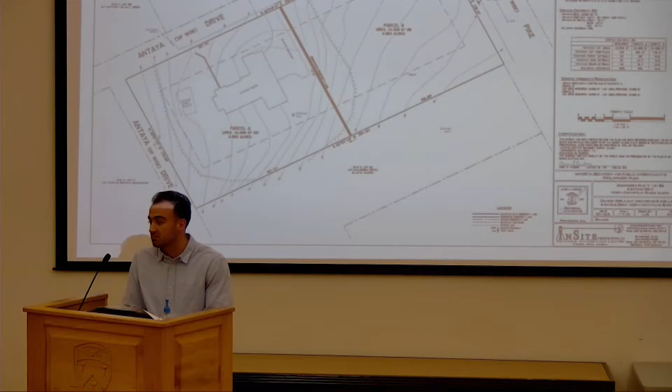Questions? Yeah, does the board have any questions? I do not. Okay. That 20-foot wide drive that's over to the left on the plan we're looking at, is that a paper street right now? I believe it is. Okay. Is that paved? Oh, that just got paved. Mark, do we know what that connects to? What are we referring to here, Jeff? The one that's running north-south. Oh, north-south right there? Yeah, that's a paper street, so it doesn't really connect anywhere. So coming off of Providence Pike, it's paved from Providence Pike all the way to probably the extreme limit of the house.

So there is frontage on Antaya Drive for the existing house, and on the proposed lot, there's frontage along Providence Pike, and then coming up, that paved area, I'm going to call that an easement on Antaya Drive. So the corner lot has pavement on both corners, and the pre-existing house lot has sufficient frontage on Antaya Drive, and they're correct. That road was just paved within the last year. Okay. Great.

All right, then, if there are no comments from the board, I'll open up the public hearing. So I'll make a motion to open up the public hearing. Do I have a second? Second. All in favor? Aye. Aye. Anybody for the public hearing? Make a motion to close the public hearing? I'll make the motion to close the public hearing. All right, we have a motion to close the public hearing. I'll second. All in favor? Aye. All right.

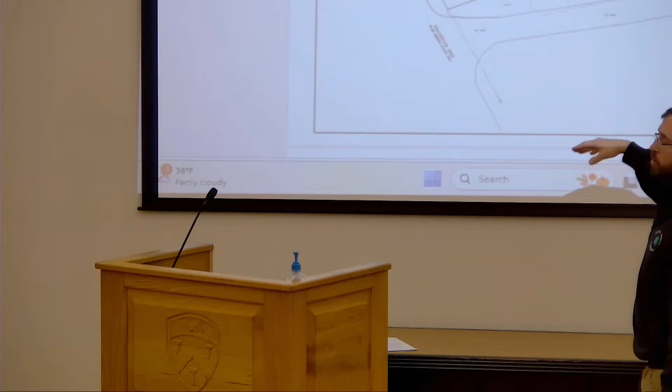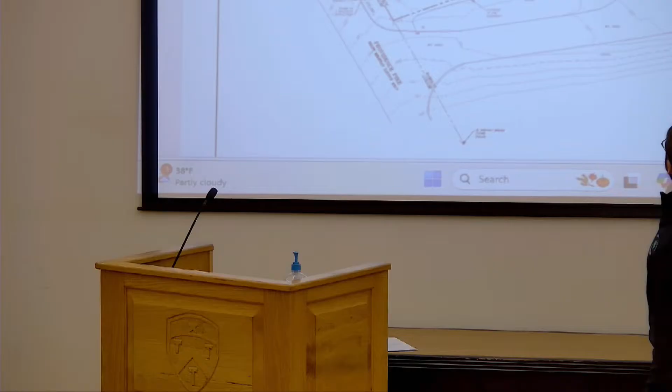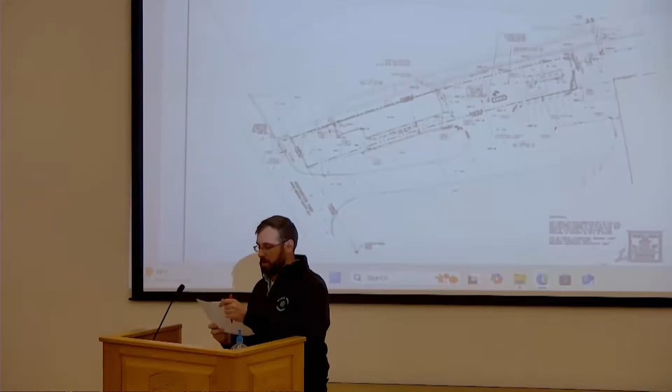You can scroll to sheet 3. This is what the current site looks like. If you could zoom in just a little, it's just fuzzy. There we go. Again, there was some expansion of the pavement in the rear of the parcel. The fueling tanks, the concrete pads are all in the back. Septic system was upgraded, and generally pavement was increased on the site from the previous site conditions. So next, going into the proposed design, or what we're coming back with for the final component of the site. If you can go to sheet 4.

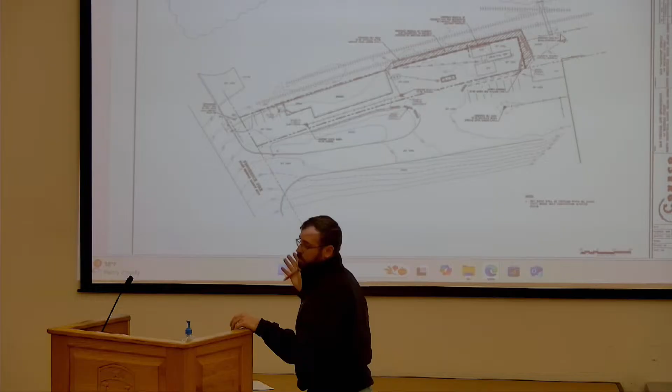So what we're gonna be doing, from the previous site conditions, is we're removing pavement, concrete, Jersey barriers, other things that had encroached across the property line. Our client wasn't aware of that stuff at the time. This was all stuff that was presented at the pre-app meeting as well. So just reiterating, given the revised submission, trying to run through it quickly. We'll be adding the positive limiting barriers. So this is sheet 4, go down to the next one, I apologize.

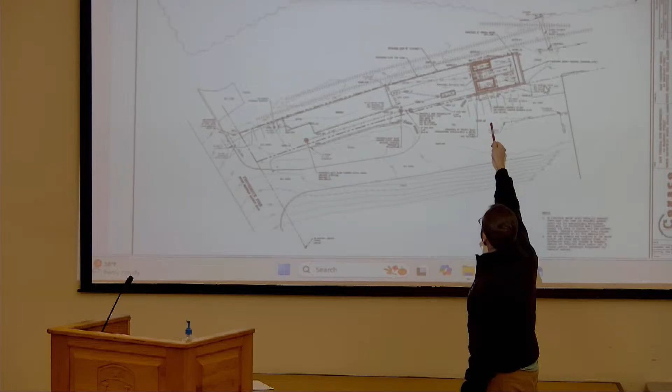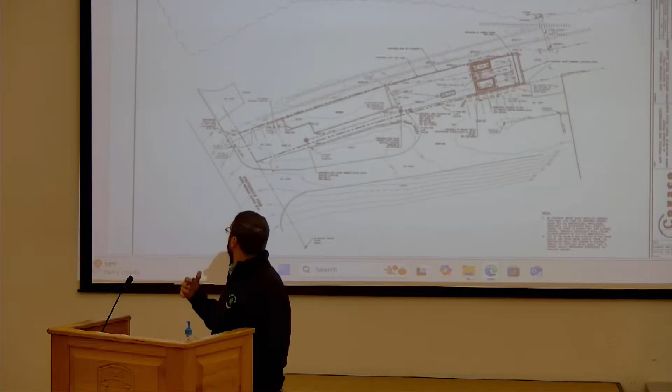Sheet 5 here. On the next sheet, I have a zoom in of the tanks and what's around there. But we're adding positive limiting barriers. Those are the grooves that are around gas stations. They're sized to catch any leak or runoff that comes from fueling operations. And then, additionally, the drainage plans, where from the previous set we've added some additional things to help with the drainage and systems there.

Previously, we just had some catch basins, a little trench drain, and some smaller stuff. To make that system function more properly, we're actually adding a trench drain that surrounds the entirety of the concrete pad. Zoom to sheet 6, right here. So this is a zoom in around the concrete pad and what the actual fueling area will be. So positive limiting barriers are obviously easier to tell here.

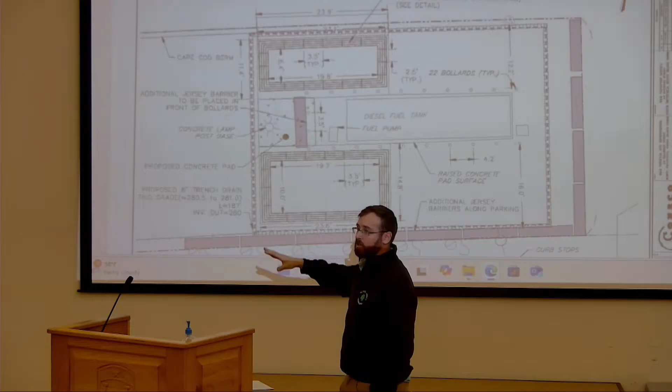Those are the grooves; those are actually sized and spaced, all done with calculations, which were supplied in the memo to meet the requirements of the fueling. And what you can see around the perimeter here is an additional 8-inch trench drain. It surrounds the entirety of the fueling tank and the fueling pad.

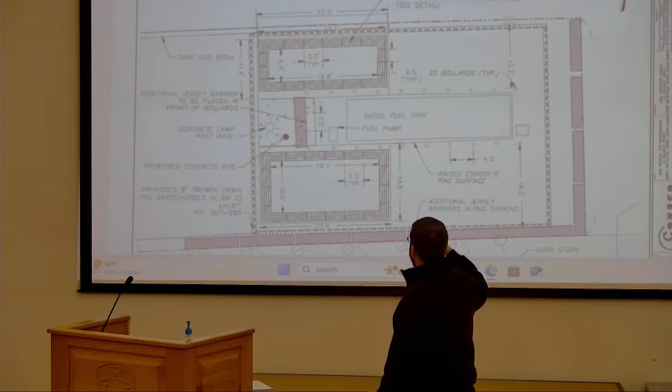So that's an additional stormwater control: any water that hits the surface around that tank and the fueling areas will be captured into that trench drain and then sent off the edge here to the drainage system, which, if we can go back to sheet 5, collects at this corner right here and goes down to, again difficult to read on this plan, a water quality unit, a Stormceptor 450i, which is sized for this volume. We included the cut sheet for that.

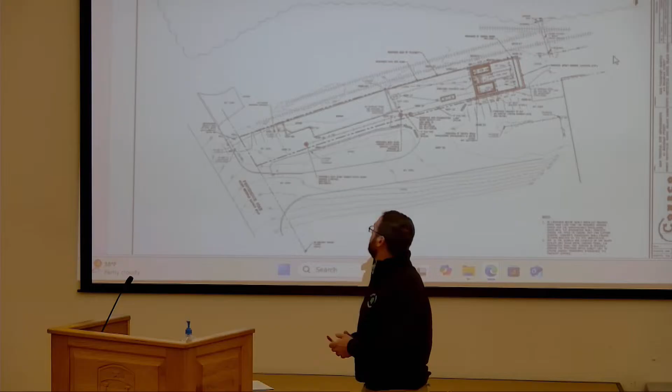The way that works, it's an oil, water, grit separator. Water enters the system, oils and greases float to the top, everything else settles to the bottom, right? That's your initial component of separation and treatment of the water quality. From there, it enters 2 proposed deep sump hooded catch basins. The deep sumps are 4 feet below the invert, so sediment has space to settle out there.

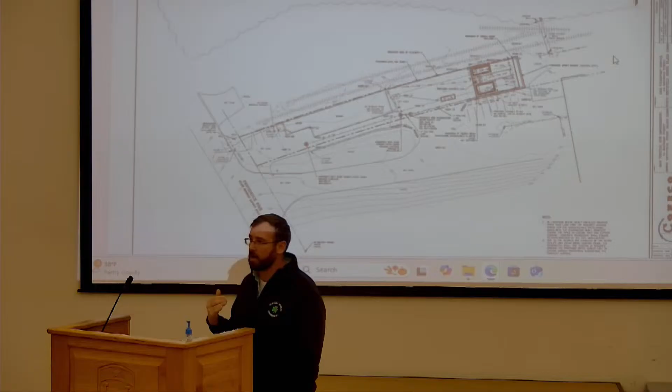And then we have the hooded outlet on those, right? Same general concepts. We're preventing oils and greases from going out by the hood, the pipe that goes down, and water flows out that way. So those are some additional features from the previous submission, or the pre-app meeting.

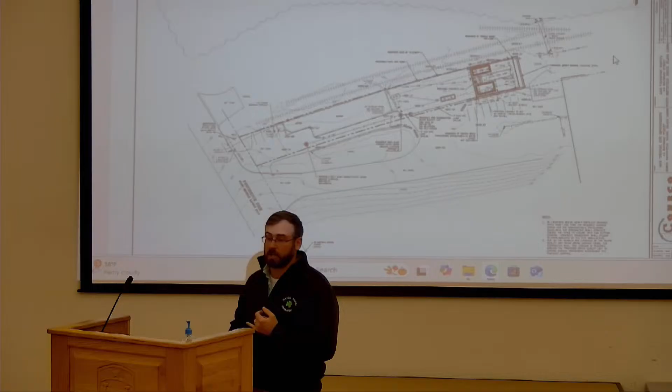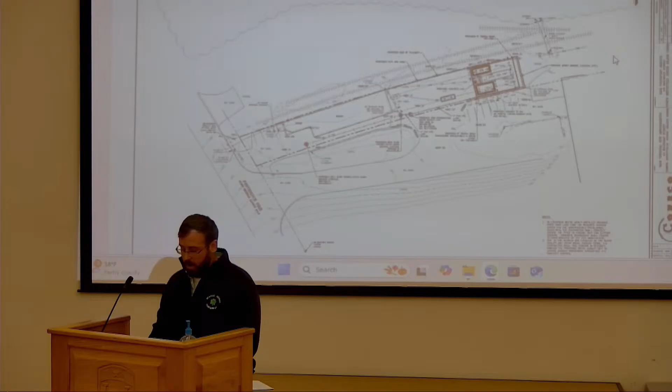DEP has supplied, in the email, the written recommendation that, as Matt had stated, there are no stormwater requirements for this site. It's out of fresh water, not disturbing a large amount of area, and there's no underground infiltration. All of these components are surface components to treat the water and contain any contaminants before it leaves the site. So those are the stormwater components that we've upgraded from the last submission.

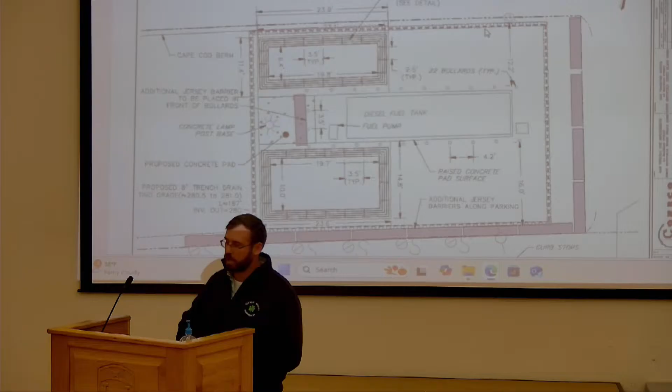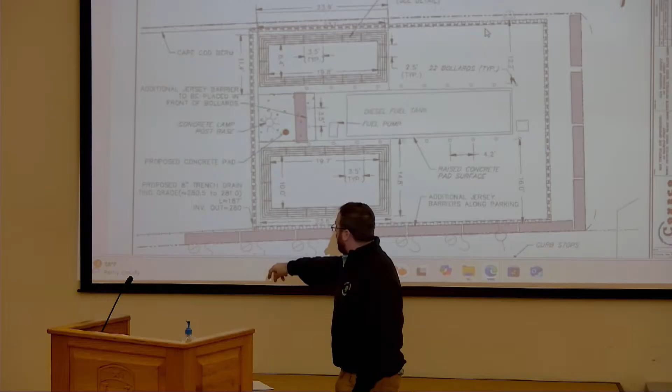And if we can go back to the zoom in here, there was a lot of concern at the last meeting about protecting the actual tank, making sure it can't be driven into, security measures, all of those things. So we've put in Jersey barriers around the entire perimeter at the property line. There's parking along this edge; you can see the signs. A vehicle would have to go through a Jersey barrier, a set of bollards, and then hit a concrete tank. So there's a significant amount of protection of the tank.

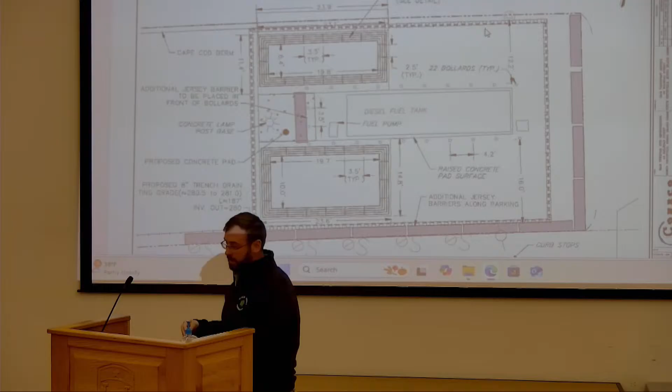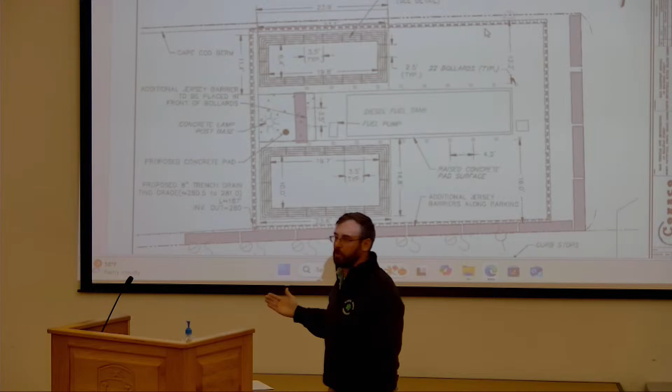Additionally, we added a Jersey barrier in front of the tank, as requested by the board at the last meeting. These are all physical things that will stop it. There's also a lamp post in front. There's a lot that someone's going to have to go through before they can make contact with this tank. So all of those components really ensure that there is no cause for concern in regards to a major catastrophe or spill.

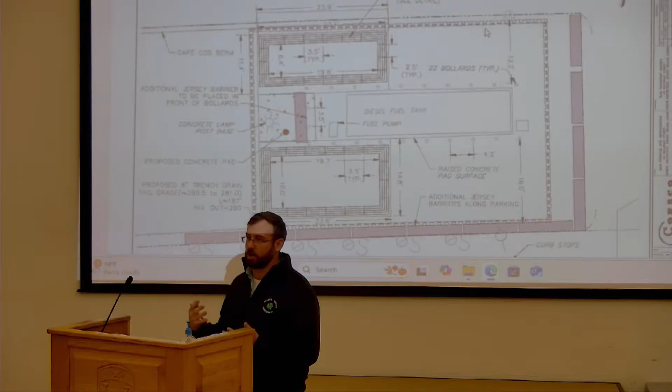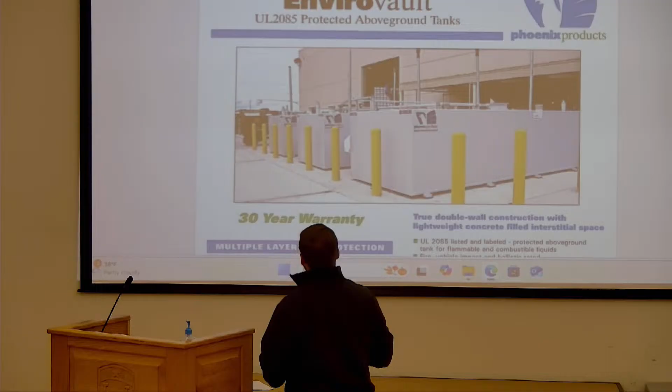If you could go back to the list of sheets, the folder. Awesome. And then we have the EnviroVault, the third one from the bottom. Here's the spec sheet that was supplied to the board prior to this. I'd like to highlight some of the components stated in the specs: it's fire resistant, vehicle impact resistant, has integral earthquake and hurricane tie downs, and is ballistic rated. This thing is a vault, an environmental vault. It's very difficult to get through.

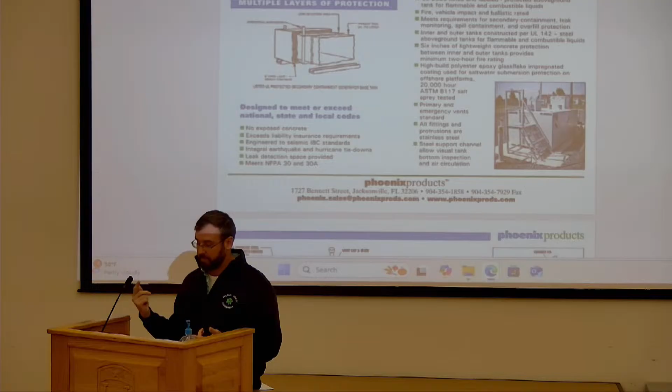It meets all the requirements for secondary containment, leak monitoring, spill containment, and overfill protection. The tank is designed not to have leaks. It's 6 inches of lightweight concrete protecting the inner and outer tanks, providing a minimum 2-hour fire rating. Steel support channels allow visual inspection of the bottom of the tank. With an above ground tank, if there is a spill, you're going to see it. It's not an underground tank where a leak goes unseen.

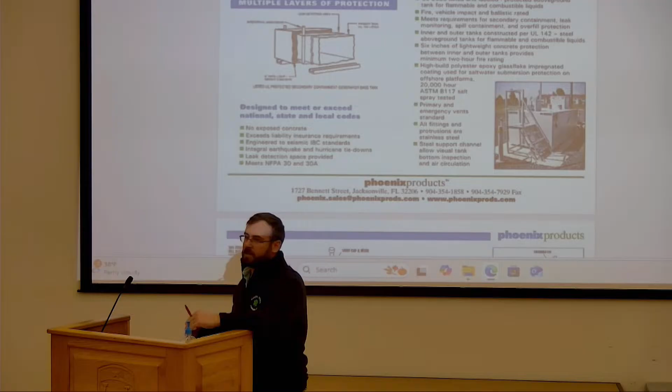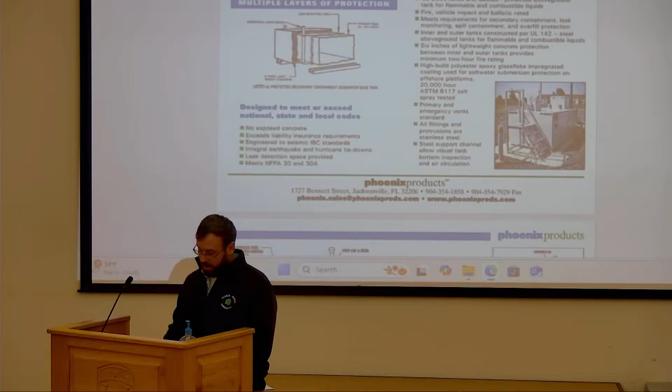So I hope and believe, with the board, that with all of these additional provisions and the stormwater components we added, we can allow the site to go as constructed, and they can start filling their tanks and using it from there. With that, that ends the presentation. I'll turn it back over to the board for any more conversation.

Okay, thank you. Any questions, comments from the board?

No questions, but I do appreciate the extra efforts and work that you've put into the containment, because I think that was definitely a concern with the original plan. So thank you for that.

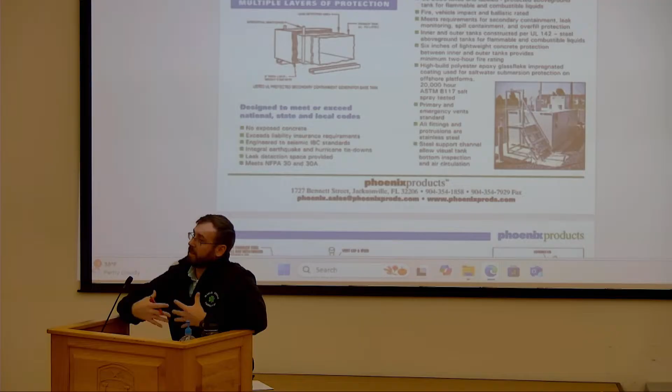I have a question. When you talked about and showed us the layers of protection, I remember Dr. Benoit had requested, I don't know what it's called, but like an impervious, almost like rubber under sort of. Yeah, so he had mentioned a bladder system. Yeah. And unfortunately, those don't necessarily work for above ground storage tanks. I think the application that he was referring to was for an underground storage tank where there would be that tertiary level needed. To add a tertiary level of containment, like complete containment, we're basically building another tank around our 2 existing tanks, because otherwise the stormwater would collect in that tertiary containment, right? The bladder system doesn't work, right?

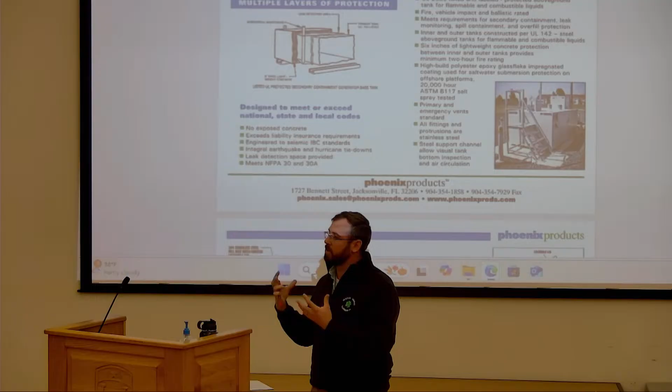Because any rain's going to hit, it's going to collect into that tertiary containment and then get held in there. So then you have to empty that between each storm, and it's counterproductive. I think our trench drain system allows stormwater to run off, and it'll collect and prevent water and fuel from escaping into the environment uncontrolled in the event of a spill, right? It has to go into our stormwater systems. It has to go into the water quality units through the catch basins. That is another level of containment. It's not the complete 10,000 gallon tertiary bladder containment that Mr. Benoit was mentioning at the last meeting, but I think it does represent kind of that third level, in a system that would help make it more compliant in that regard.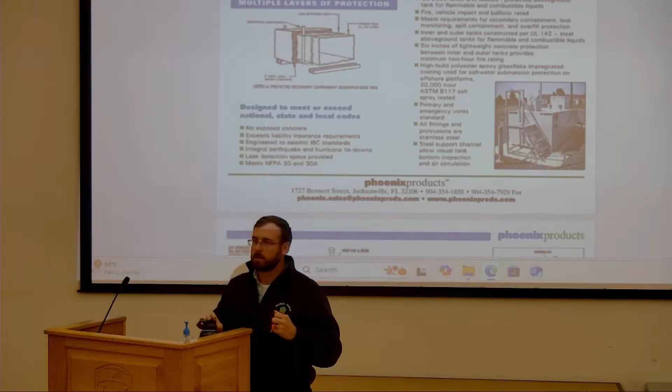Do we have a point where we discuss this as a board? Because I don't think I have more questions related to that, but I would want to discuss that at some point. We can do that right now. Okay. Yeah, I just wanted to say, it's actually over an aquifer overlay district, not just watersheds. It's drinking water. And residents are very concerned about our aquifer district. And 10,000 gallons is I think a swimming pool.

And so I have been thinking about this since the last time you were here. And I was thinking of the berm and the rubber thing that Doc was talking about. So if there were a leak, it sounds like there's a filtration system where some of it would go into, but what about if there were a significant leak that was not seen quickly enough? What happens to the oil or the gas that comes out? Sure, I can speak to that. I'm Brian Klingler. I'm a principal environmental at Conoco Environmental Engineers and Scientists. I'm a PG and an LSP.

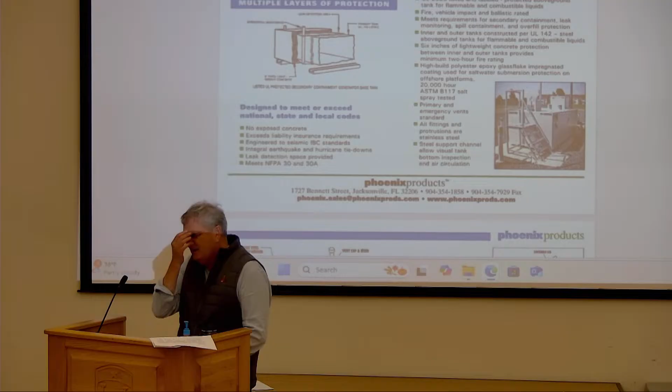The point of having an above-ground storage tank, and the biggest advantage of it being above ground versus historic releases with underground storage tanks, is you can visually inspect it. This has steel channels underneath the tank itself so that the bottom of the tank can actually be inspected during the course of the use of the tank. So it's not like it can have releases to the aquifer that would go undetected. Everything is above ground. Under the secondary containment, this is a steel tank and then a concrete wall barrier and then a second steel tank and then an 18 mil polymer coating. So you have 4 layers of protection. You can see the bottom of the tank.

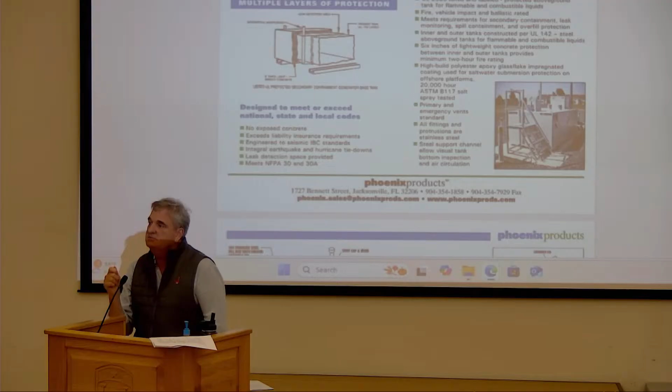Any spill that would occur at the worst would be a pull away on the line, and that has automatic shut off protection. So you're dealing with a 10-gallon release at most if that were to ever occur. And obviously there's contingencies upon that. But there is no way for this tank to leak short of a ballistic event. I mean, it's ballistic proof, so we could go down scenarios where you could have a release of that large scale, but I don't see how that would happen because it has fire protections, impact protections, and it's bermed.

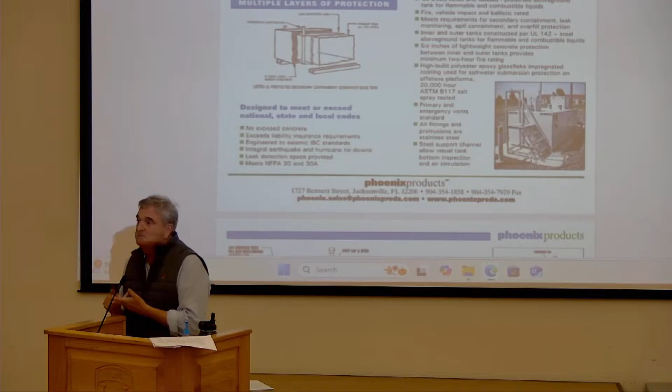It is really state of the art. So you can go down so many levels and hypotheticals. But I did a study out there where we put 3 monitoring wells. So we have looked at the aquifer. It's non-detect in terms of soil. It's non-detect in terms of groundwater. You can drink the water underneath this tank in this facility. It is a maintenance facility, so it's good stewardship currently with the ownership. They take it very seriously. So we will be able to monitor the aquifer. And in terms of a cataclysmic release, I just don't see it occurring.

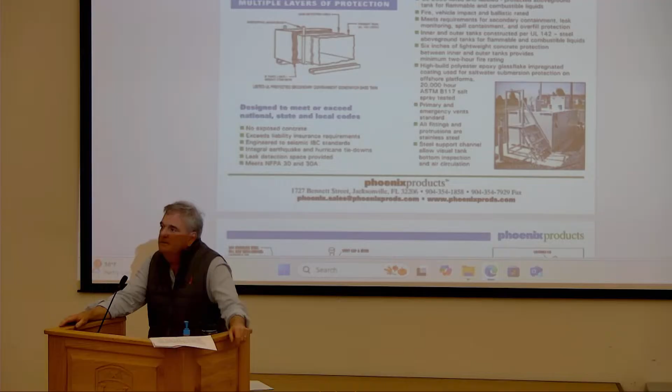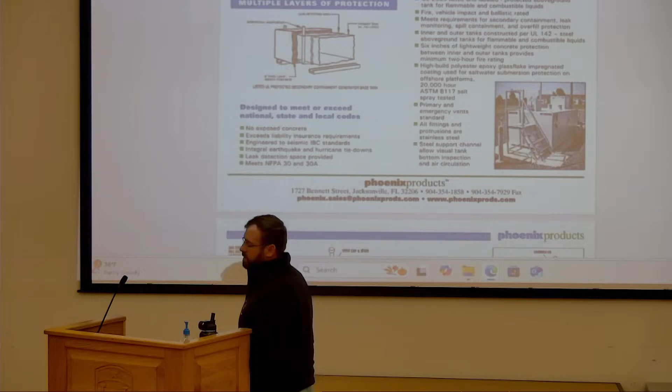Thank you. That's helpful to hear your explanation. If I could just also add, I think you mentioned that the catch basin did have the capacity, if there was a catastrophic spill, to absorb the 10,000 gallons. Is that correct? Did I hear that right? So the catch basin systems aren't sized for that. They're for stormwater.

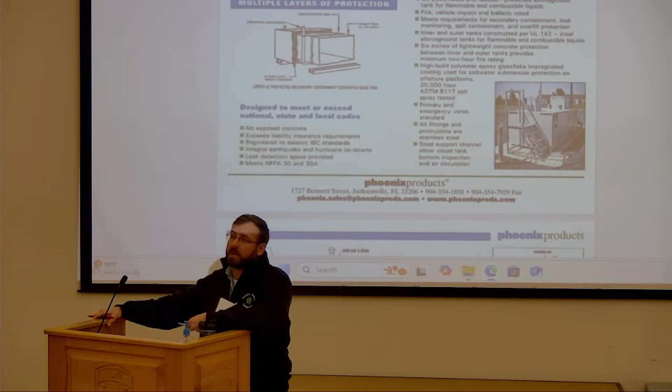The bottoms, the sumps within those, are meant to collect and hold stormwater and actually allow for sediment to settle out to the bottom. There is a component of the catch basins that will prevent oil during standard leaks and things like that from continuing out the stormwater flow paths. And those need to be cleaned and maintained and monitored. And if there is the event of the spill, as Brian said, there's so many contingencies that the on-site maintenance crew needs to perform to prevent that from getting into the catch basins.

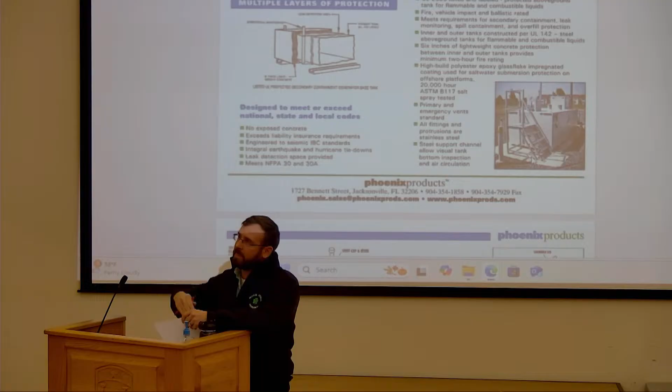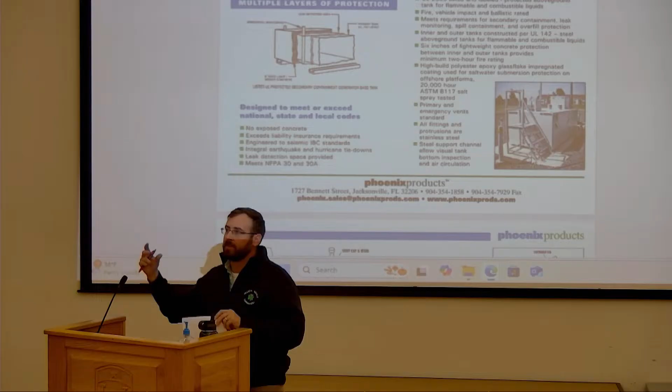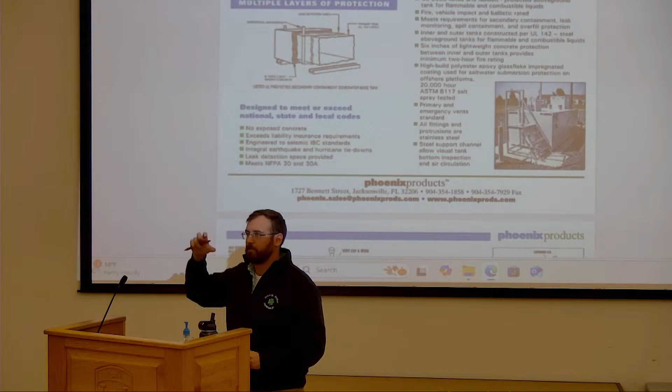The catch basins will need to be cleaned in those cases, right? But they're not sized to hold the entire 10,000 gallons, because if that was the scenario, that space would just fill up with stormwater, right? And then that void space doesn't exist. So from a stormwater perspective of how that works, the tertiary system doesn't work, because stormwater is going to fill up that void and prevent any containment in that event. Does that make more sense? Thank you.

All right, if there's no other comments from the board at this time, we'll open up the public hearing. So I'll make a motion to open up the public hearing. Do I have a second? Second. I have a second. All in favor? Aye. Aye. All right, so we have the public hearing opened at, Gary likes to do the time, 7:30. If there's any comments? Going once? All right. Make a motion to close the public hearing. Do I have a second? Got a second? All in favor?

Aye. Aye. All right. So the first item that we have to do for this application is to request the zoning relief that's been outlined by the planning department in our packets. Are there any questions in regards to that? It's more of a comment, and if now is not the right time to say it, let me know and I'll say it another time.

I just want it known for the record as a resident and a member of this board that I'm not happy that a previous employee of our town encouraged the owner to proceed at their own risk. I think that's really bad business, and it's not looking out for the well-being of our community, and it's not in line, to my understanding, with how we should do business. And I realize it happened, and then the, I don't want to say remediations, but the approaches are attempting to be faithful as well as we can expect, but I'm just not happy that it happened in that order. And I'm saying it for the record because I don't want that to happen in the future.

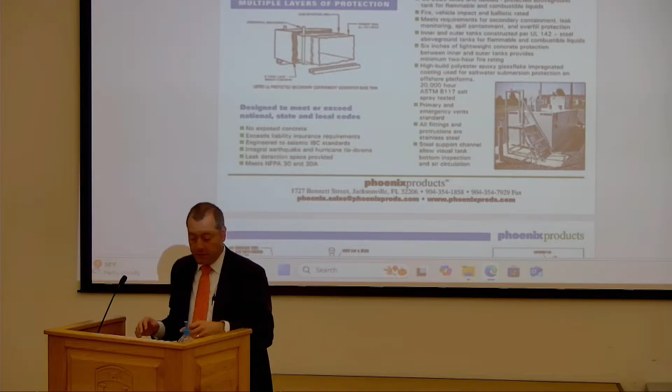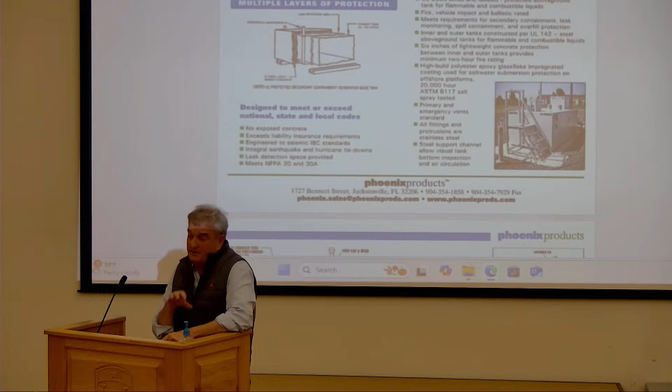Also, I would say on a federal level, the site is subject to a spill prevention, control, and countermeasure plan, and that is an annual review process that we do at Conoco, and it needs to be updated. So there is an SPCC plan for the property, and that's on a federal level what you do to monitor the tank. Okay, thank you. Mark, would it be worth adding that as a stipulation that report gets provided to the planning department? I would say that would be a reasonable stipulation if they're doing it anyway as a federal regulation, they could certainly provide that.

Well, I would add, similar to stipulation number 2 with the stormwater management, that they also provide that annual reporting to the planning department. Does the applicant have any objections to that? No objection. Okay. I think the other related piece, because it's different from the federal plan, is the maintenance manual that you said you would be willing to submit to the planning office. Yeah, there's no objection to that. It's pretty standard, so we're happy to do the tank maintenance manual. Okay, thank you.

So I would ask that we could perhaps combine that stipulation to provide the maintenance manual as well as the annual reporting to the planning department. Okay. All right, any further discussions? All right. I'll make a motion to approve the land development project incorporating the planning office findings and the stipulations and recommendations that are outlined in our memo here, with the addition of the stipulation that was just mentioned with the federal requirements and maintenance plans.